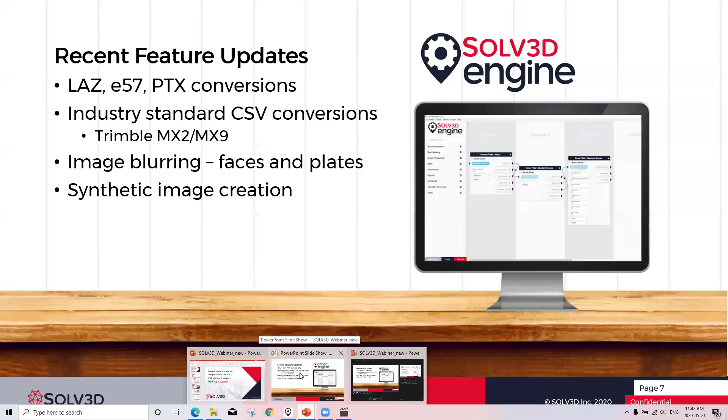On the Encompass side, this is a fully web-based application, so there is no installation. The data just has to be web accessible, as I mentioned earlier. So whether you're hosting it in the cloud or on your own web server, it just has to be accessible to the internet. White labeling is available at no additional cost, and we've recently received the Release Ready Specialty distinction from Esri.

Some of the recent features on this side include additional measurement tools, including piles and pits, as well as the ability to create elevation profiles, 3D model support in the form of IFC files which can come directly from Revit, and ArcGIS Online layers in both public and private, as well as many others that we'll look at here today in the demonstration. So I'll take us to that demo now.

So this is the SOLV3D Encompass application. Again, here I'm just using it in Chrome. This is the login screen. Each user will receive a username and password, and we do support single sign-on for those clients who use that.

Here on the home screen is where we have our projects. We have a map. In this case, I'm zoomed out to the full world map, as I have projects from everywhere from Alaska through to South Africa. To get into those projects, we can either simply click on them individually here on the map, we can hover over the larger grouping and find our project, or we can actually locate it from up here in the top left.

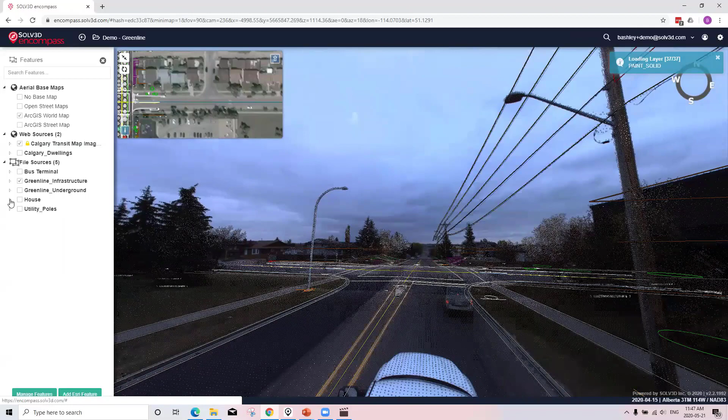That have been brought through from your ArcGIS online. If the layer wasn't private, you'd simply be able to click it there and turn it on. Go back into 3D view. So in addition to this, we've always been able to bring in those CAD models and shapefiles, which are loading here. These are feature extracted by the client in this case. However, now we've actually brought in the ability to bring in those additional data sets.

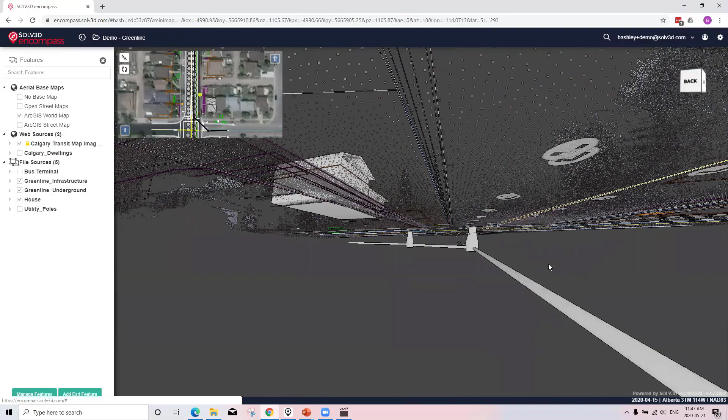In this case, there's a 3D house that's been brought in here, as well as underground facilities. So if we actually go underground here, we can see the manholes and pipeline that connect underground. So this is some new types of data, again, that are able to be brought in here under the file sources and now looked at.

Exit 3D mode and go back to the street.

In addition to this, we've added the bookmarks option. So if we want to have a location in the data that we want to send out to a client, and ensure to maximize the sharing and collaboration side of things so they're seeing exactly what we're seeing, we've created the ability to save a current position and look. If I click on this, it'll take me to that location. You'll notice the layers have been turned off and the different models have been turned off as well.

This is an ability to create that bookmark location, to share that out to clients and stakeholders. You can imagine using this bookmark option to tag a location you're working on. If you're doing a QA/QC of this data and want to ensure you're not duplicating that effort, you could make a bookmark at the location where you've left off, or create one at a location you want to go back to and reevaluate whether that data looks right.

Finally, here inside of this project, I want to talk about our new data export option. This is the ability to take a clip of data and bring it into whatever application you might need. So I'll simply make a polygon around this intersection that I'm interested in, give it a name, and add the data. Once I've done that, I can generate point cloud and images from that location. Any of the points that fall within it, as well as any images, will be brought out.

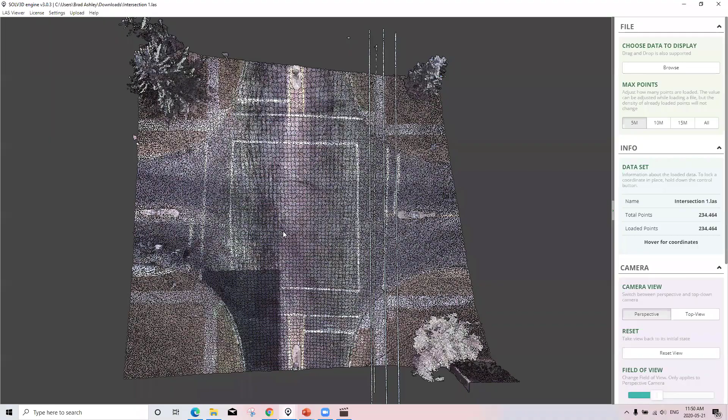You could take that into Recap and into an Autodesk application, or into any GIS application that'll accept a LAS file. In addition, on the images side, we can generate a zip file of all the panoramic images, as well as a CSV of those locations. I'll quickly open up this LAS file that came out so you can see the clip is there. The important piece here is that snip of the data didn't affect the back end of the database at all. So you can have multiple people taking small clips of data to do their feature extraction or modeling, and that original data set is still fully there.

All right, I'm now going to jump to another project. I'll jump to the 3D Rig project. This again is a mobile scan that was done with panoramic images. In this case, I've set this up to instantly load my bookmark location as I want it, with the right colors and features.

You can now see in this option I've got a navigation which has been modified recently. Up until recently, you would see a sphere at each of the locations of the image collection. Now we've created this ability to just simply click and jump to the next photo. That's managed under settings, and here under panoramic viewer you can change whether you want the arrows, spheres, or even none, so you could take screen captures of your information.

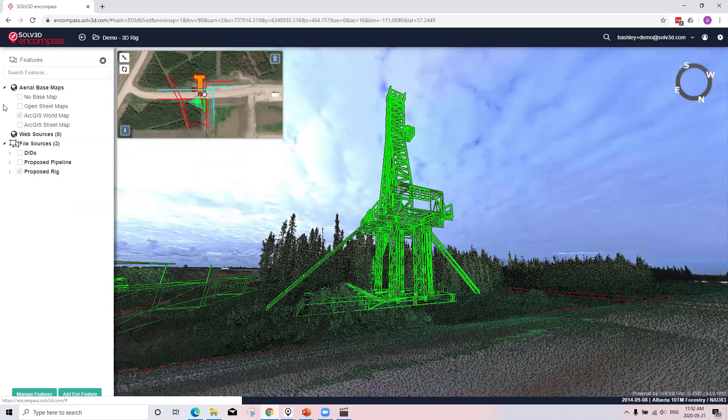I'll turn on, in this case, a proposed 3D rig that's on the side. With this 3D model, you can actually do some measurements. So if you wanted to know how high that railing was from the deck, you could do that and find out your measurement, always being able to convert to imperial if you need to on the side.

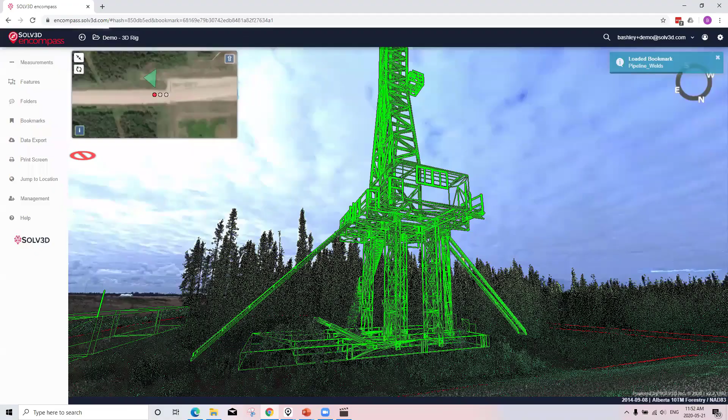Here as well, I did set up a bookmark of a location that I wanted to show you. I can click on that and quickly go to that location, and all of the models turn on that I'm looking for. Here we've got a 3D pipeline that's been developed, and as well we have some asset tags that have been done. In this case, there are some welds on this pipeline that were of interest. They were tagged in the field and given some information, and a photo was taken in the field that was attached. So here we have our asset tag, which allows us to do that.

If you want to create a new asset tag in the field or in the office, you can always just right-click, create new tag, and a widget will pop up that will allow you to create the title, comment, etc., as always.

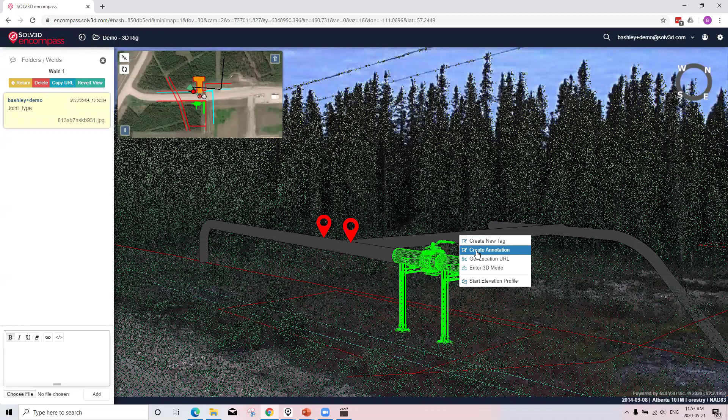In addition, we have the ability to create an annotation tag. So if there was a concern at a location, we could mark that up and save and exit, or save and export that out as an image to send out to someone in an email.

We also have built an API for managing these asset tags. So if you're using an asset tagging solution where you've already implemented a bunch of those features, you can actually use the API and bring those through. And as you make changes in either our application or in your asset management solution, you can see those different assets.

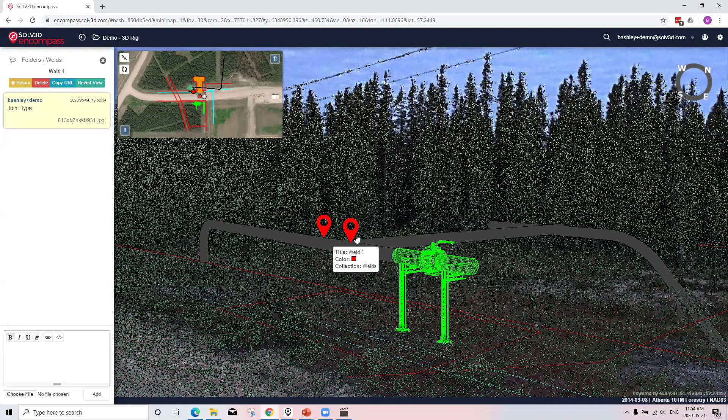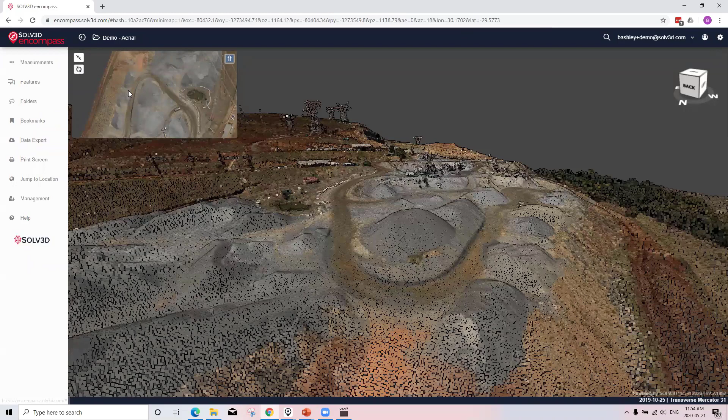Finally, I'm going to jump to an aerial tile or an aerial project. In the past two cases, as I mentioned, they were mobile scanning with panoramic photos. In this case, this is an aerial collection. So we've got aerial LiDAR that's been collected at a high density here and colorized, as well as, off the top, we were talking about different data types. So this is one of those aerial tiles. In this case, it's 3 centimeter imagery that's been loaded in here. You can see the clarity of the image that's been loaded.

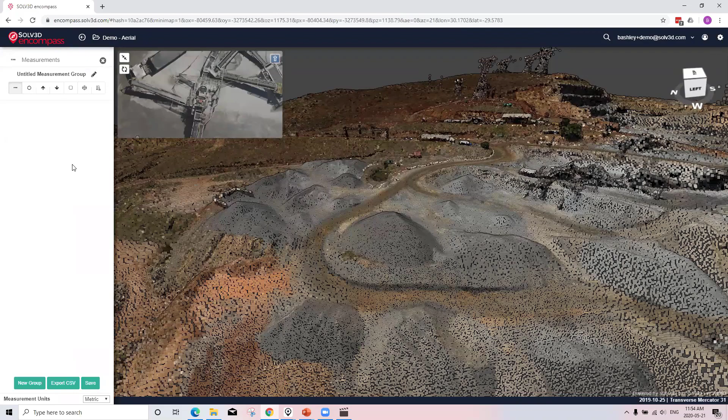If I go back into my 3D view, I'm now going to talk about one of the new measurement tools, starting with our new volume option. So maybe we want to do a pile measurement on this to find out what the volume of gravel in this pile is. You simply click around the exterior of the area that you're interested in, give it some definition, and double click to end. Now you'll see the points that have been included in that.

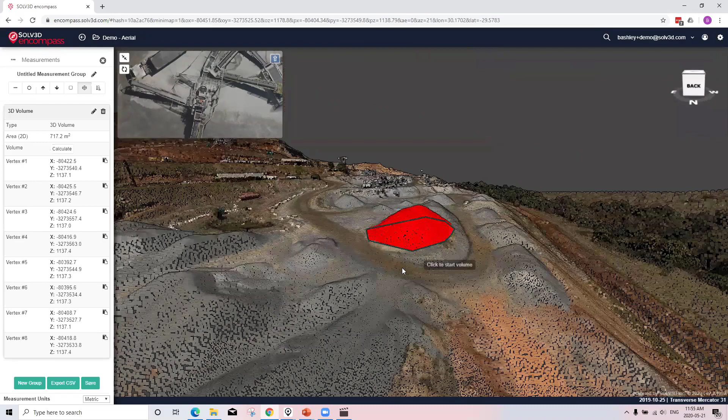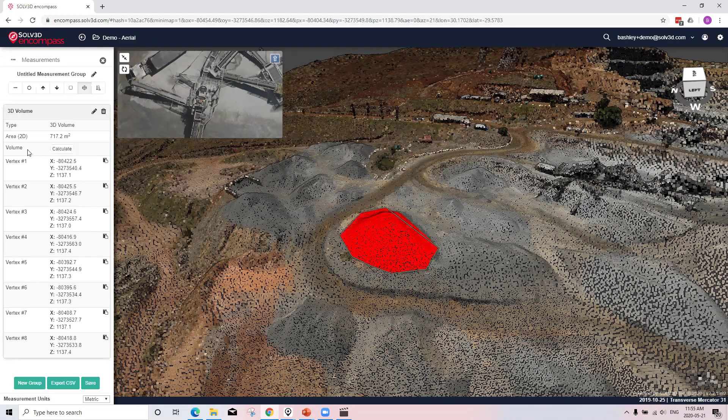If you needed to move it, you can always move the vertice to include more gravel. And then now on our left-hand side, we can see that we have a 2D area, as well as the ability to calculate a 3D volume. So if I click that, I now have my volume in cubic meters. Again, down here at the bottom, if I need this in imperial, I can get that in cubic yards.

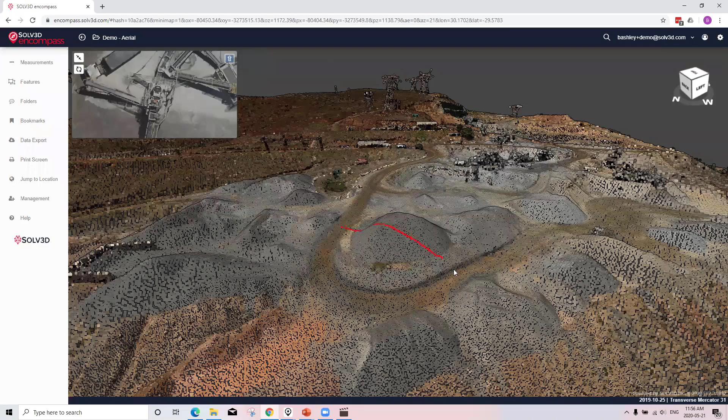In addition to the ability to create those volumes, we've now also included the ability to create an elevation profile. So we'll start the elevation profile on the street on one side and end it on the other, giving us a full cross-section of that pile. So as we can see, as we move along, we can see the different heights or elevations.

As well, we can always change this into feet and survey feet. We can also decide which points we want to include, if we want the highest, lowest, or all points that are within that swath or profile. We can now save this image or copy it if we need to take it into a report or something we're working on.

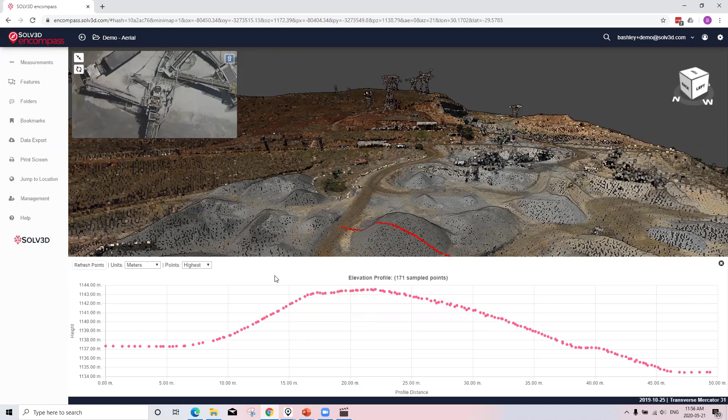And now I'll jump back to the PowerPoint. So as you've seen, a number of new features have recently been brought into the applications. However, we obviously are always working on new applications.

So in the short term, we'll be working on some new improvements on the command line engine. This is designed to allow users to introduce our commands within existing workflows and program languages that you may currently be working with. As well, we'll allow for multiple point clouds to be loaded, bringing multiple different areas of a project in as separate point clouds. You can imagine maybe you have a several-story building and each story has been collected as a different point cloud. Or maybe you've collected mobile scan along a highway and then gone back and done terrestrial scanning underneath bridges or overpasses, and want to keep those as separate project areas. That will be available in the coming month.

Additionally, we'll be adding some IFC models improvements to make that experience a little more streamlined. In the more medium term, within the next few months, we'll be doing more on the support of measurements and tags in image-only projects. So for those of you who collect panoramic images only and don't collect LiDAR or point cloud, we're looking to do additional support for those on the measurement side as well as the tagging. And finally, we're looking at improving our search functionality, specifically the integration of LRS systems, or linear referencing systems, to ensure that we are providing the applications and tools that you need to make your projects work.